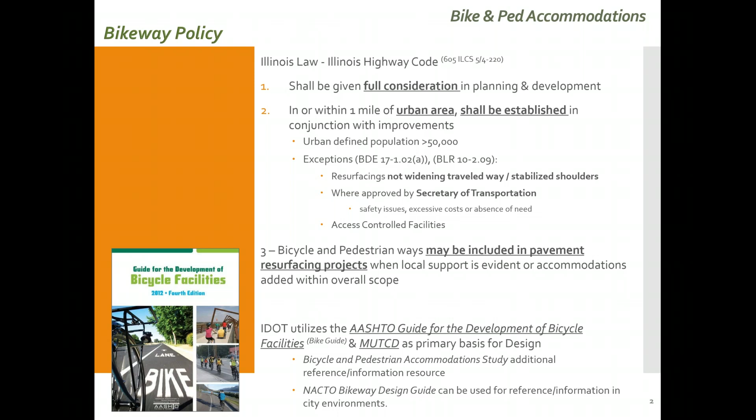So the Bike and Ped Accommodation Study is a 3-volume document that we developed that has 20 facilities for bicycles and pedestrians. It's broken down into overall findings. And basically what we did is we were starting to get a bunch of requests for these accommodations that weren't necessarily typical for IDOT to implement in state highways.

And we kind of got tired of always saying no because we just didn't know how they would perform. So we put together this document that aggregates the research done for multiple facilities in the tenets that IDOT looks to evaluate, which are safety, operations, and maintenance. So we had a consultant, Primera, do this study for us, and it's a pretty robust document. You can see how it's broken down.

Currently, it's available on IDOT's website. So the link is provided below. If you go into the travel information under recreation, trails and paths, you will see the study is available for public use.

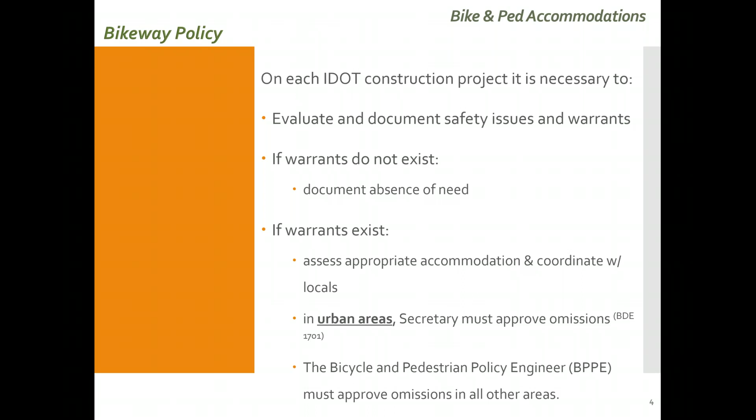So on each IDOT construction project, IDOT evaluates and documents safety issues and bikeway warrants. If the warrants do not exist, IDOT will document the absence of need. If they do exist, we will assess the appropriate accommodation. And then in urban areas, as I mentioned before, the Secretary must approve any omissions. Any areas outside of urban areas, our bicycle and pedestrian policy engineer would be the one to approve those omissions.

I wanted to put this slide here just to remind everybody what IDOT's cost participation policy is for bicycle facilities. Basically, if you're on a structure, IDOT pays for any bicycle pedestrian facility at 100% our cost. Anything on road would be 80-20 local cost participation unless it's a shoulder. At that point, IDOT pays 100% of those costs. And if it's off-road, it's again an 80-20 split. If there's an existing path, either a sidewalk or a bike path, and IDOT is impacting it, we pay for it at 100%. We replace it wherever we're impacting.

And then for maintenance participation for structures, IDOT maintains those facilities. There's a couple of asterisks in there, and it's because IDOT does not plow bike paths or sidewalks. So on structures, we'll request the local agency to take over that maintenance responsibility. But if the sidewalk settles, it's considered a structural element, so IDOT will improve it whenever it's making structural improvements to the bridge. For on-road facilities, IDOT will maintain traditional or buffered bike lanes.

And there's asterisks in there because if there's bike symbols, those are usually also transferred to the local municipality for maintenance, just because our cycle of restriping is less frequent than for local municipalities. And then locals are responsible for on-road accommodations if they're separated bike lanes, which I'll talk about in a few minutes, and then vertical separation elements as well. If it's off the road, so any sidewalk or bike paths that are off the road, maintenance is always transferred to the local agency.

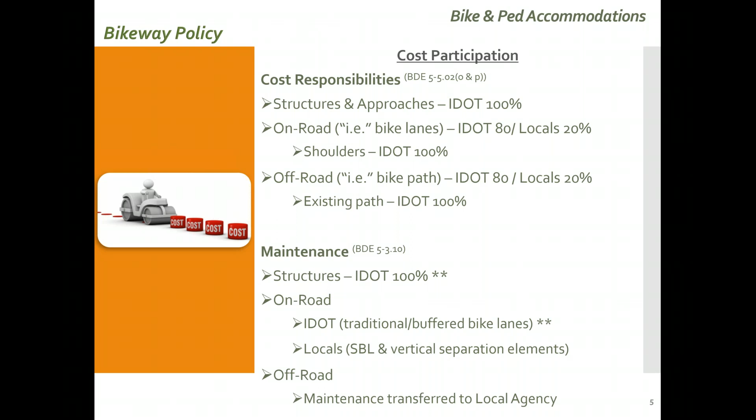So in 2019, we had an update. So the next couple of slides, I'll go through what those updates were for the Bureau of Design and Environment Manual. So there are 5 warrants that IDOT has to look at for bikeway warrants. If we meet any one of these warrants, then accommodations are pursued further. The first warrant is the planned bikeway warrant, which basically is if the route or street is designated as a bikeway or recommended bike route, it would trigger that warrant. Second warrant is a volume warrant, and I'll spare you reading the smorgasbord that's in there, but basically if we expect more than 25 bicyclists, then that warrant would be triggered.

The next one is a destination warrant, and this one was updated with the revisions. It's basically, does the road provide access to a park, recreational area, school, or other significant destination? This warrant is somewhat subjective because, what do you define as a significant destination? But it used to say, does the route provide exclusive access to a park, recreational area? So because that exclusive word has been taken out, this warrant is almost always going to be triggered because it's what do you define as a significant destination?

The next warrant is an access warrant. And basically I call this the bridge warrant. If your roadway provides access across a river, railroad, highway, or any other corridor, then we understand that structures are expensive and they're cost prohibitive. So if there's a structure that IDOT is working on, more likely than not, we will make sure that bike and ped accommodations are not precluded from occurring in the future.

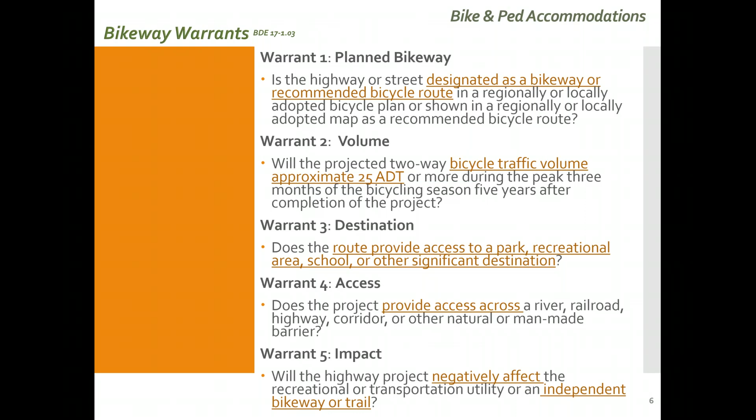This is the updated facility selection table. This is what our engineers utilize to determine what the recommended accommodations are. This table was revised; in its previous incarnation before 2019, the last column on the right was a shared use path column. So oftentimes for high-speed, high-volume roadways, that was the recommended accommodation. You can see that we've revised it to be all on-road accommodations.

And the reason why IDOT decided to go this route is so that the cost participation element of a shared use path was no longer part of the equation if it wasn't needed. So it does provide engineers the flexibility of including a shared use path in all contexts now. Whereas before it used to be high speed, high volume, now it doesn't matter; as long as you're able to put in a shared use path, you're able to do it under any context.

One thing to note is that local coordination and site conditions will affect or require modifications to the recommendations from this table. So the design may be adjusted. However, providing the highest and best bikeway facility that conditions and context dictate is better than providing no accommodation at all.

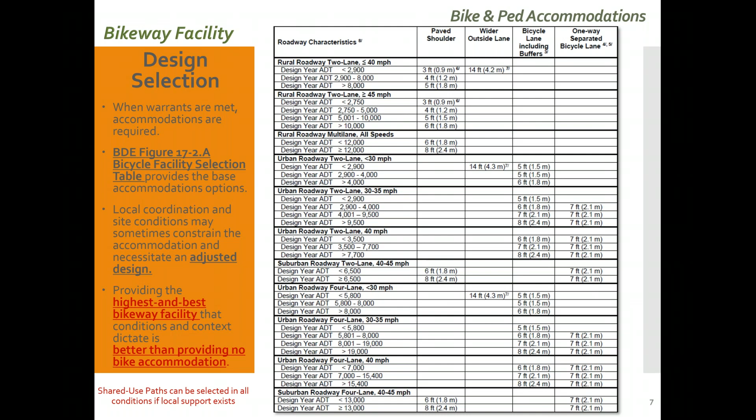This update adds some information for resurfacing projects to add some awareness to the designers that, yes, you're not required to install bicycle accommodations with resurfacing projects. However, you should take a look at the feasibility of doing it if you have the roadway space to do so. That is something that's new to the engineers at IDOT. So I have a training scheduled for them later this month to try to get them used to looking at this as part of their resurfacing.

And there's a process that we've outlined for them to take a look at these resurfacing projects. Again, because they are so short notice, oftentimes they may not be able to provide accommodations, but we're trying to encourage them to move towards the low-hanging fruit if they're able to take advantage of it.

In the case of rural projects, ever since the policy for complete streets came out in IDOT's BDE manual, we've always paved shoulders. Whereas before we used to have a 3-foot paved, 5-foot aggregate shoulder, ever since 2010, we've been doing mainly fully paved shoulders. So we will pave the full 8 feet because it's a win-win, both for bicycle and complete street accommodations for rural and suburban areas, as well as providing a safe space for cars to go if they're stalled or to pass a stalled vehicle, to improve safety of the roadway.

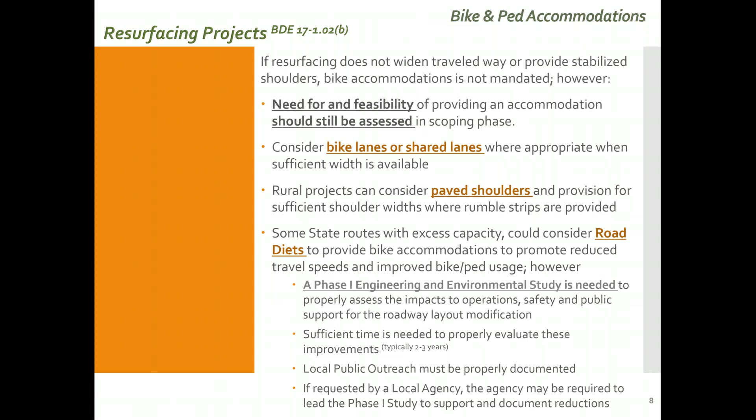One of the modifications that we've made in the last few years: rumble strips are very important to IDOT for run-off-the-road crashes. They help to wake up the drivers. However, when you have a 4-foot shoulder and a 16-inch wide rumble strip, it becomes an encumbrance on the bicyclist. So we do have a revised highway standard to have a smaller footprint for the rumble strip, still include those rumble strips, but allow at least 3 feet of space for cyclists to have a safe space to ride on.

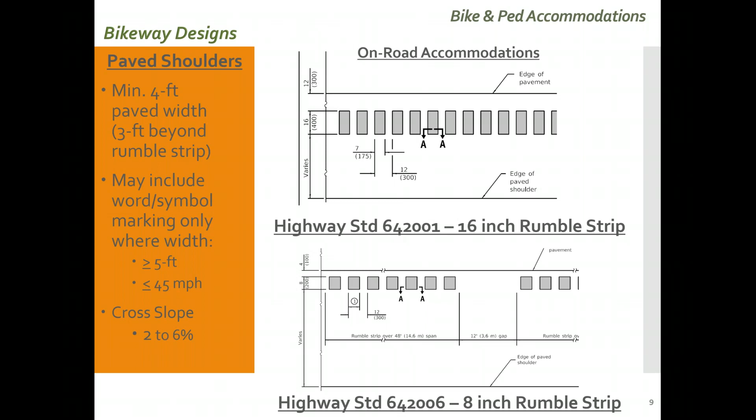So that's one thing that sometimes gets overlooked. We're just trying to make sure that people are aware that they do have that flexibility for ensuring bicycles are accommodated even on safety improvements.

So shared lane markings are a new addition to Chapter 17. They're commonly referred to as sharrows. So we have guidance on shared lane markings. They're approved in the MUTCD. So we have design guidance for minimum requirements, as well as for roadways and for bridges. And then we do provide some guidance as to the spacing of the sharrow symbols.

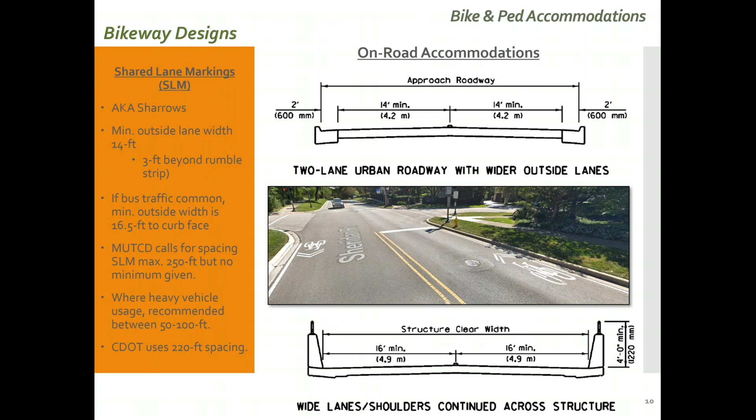And I'm not going to go into the detail of all of the different requirements and distances that are shown in the slides, just because of limitation in time. So I just wanted to make that clear. The presentation that I gave at the Ride Illinois Summit on Monday is more robust, and I go through all of these different details, and it's like a 2.5-hour presentation. So I didn't want to bore you today.

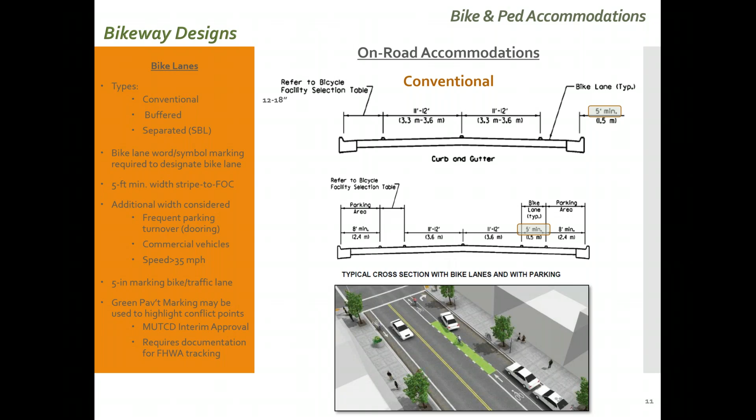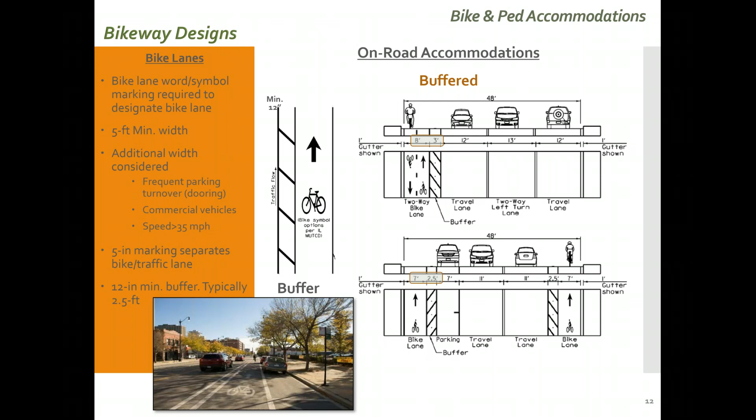Bike lanes, conventional bike lanes were included in the manual before 2019. However, we do have increased guidance on buffered, and separated bike lanes are brand spanking new. Although conventionals were always there, you can see that for buffered bike lanes, we have design guidance for 2-way buffered bike lanes, as well as 1-way buffered bike lanes. And then the separated bike lane is one of our latest additions. This is new as of 2019. It does provide guidance as to what those minimums have to be.

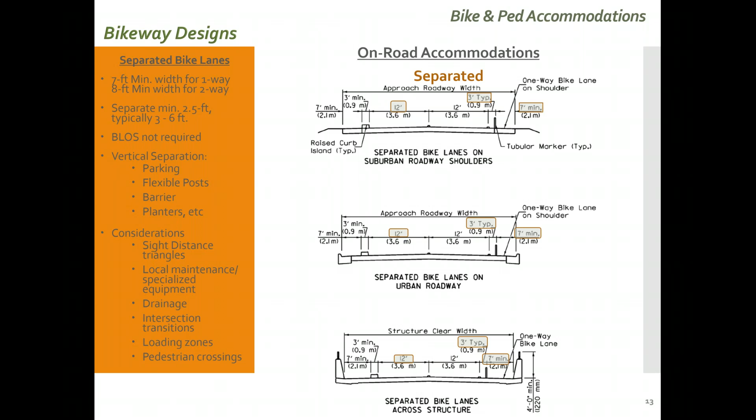We had an improvement that we did in the city of Chicago, which is to date the only separated bike lane on a state highway. And it was Clybourn Avenue from Division to North Avenue, and you can see that it was a retrofit improvement that we did, but we partnered with CDOT to develop the separated bike lane, and that study, along with the bike and ped accommodation study that we published on our website, helped to give guidance and structure to this section of the BDE 17. So it talks about considerations for drainage, sight triangles, intersections, transitions, loading zones, things of that nature.

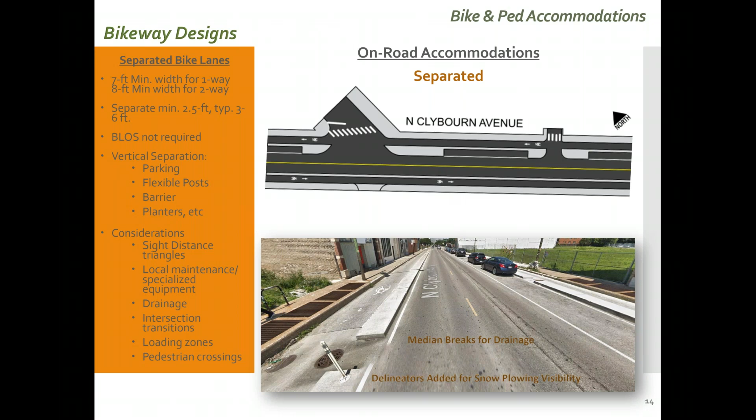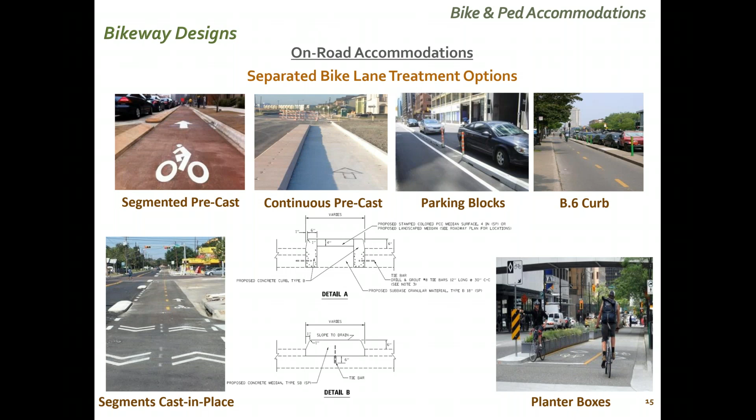As far as the vertical separation elements, we do not specify what that vertical separation element has to be. For our Clybourn project, we looked at numerous options that were available to us, and ultimately we decided on a cast-in-place B-6 curb. But there is flexibility in the policy for making it either more expensive but more aesthetically pleasing and a higher facility, or less expensive and able to be quickly implemented. So there's some flexibility in the policy for those.

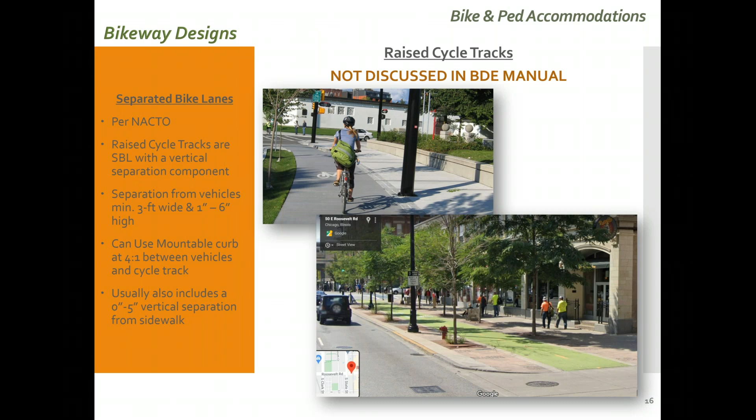One thing to note is raised cycle tracks. The city of Chicago does have some raised cycle tracks. However, these are not discussed in the Bureau of Design and Environment Manual. We are looking into this in terms of our policy. So central office in Springfield is aware that this is a gap in our policy. So they're looking into best practices and some guidance to provide our staff, so that in case a raised cycle track becomes either a request or the more appropriate accommodation, our engineers will have some guidance as to how to implement them and what requirements they have to meet. So we just wanted to make you all aware of that.

The intersection treatments section of Chapter 17 has been greatly improved. It has facilities that are brand new. Some of them are under interim approval by the MUTCD. We've introduced bike boxes, two-stage bike turn boxes, dotted bike lane extensions through the intersection. Green pavement marking is an area that our Bureau of Design and Environment Manual now discusses. Before that, it was not discussed. We do not have green pavement markings on state highways. There is a concern from our operations staff and our maintenance staff about maintenance liability for these stripings, but at least now that it's in our design manual, it'll give our engineers and staff another tool in the toolbox.

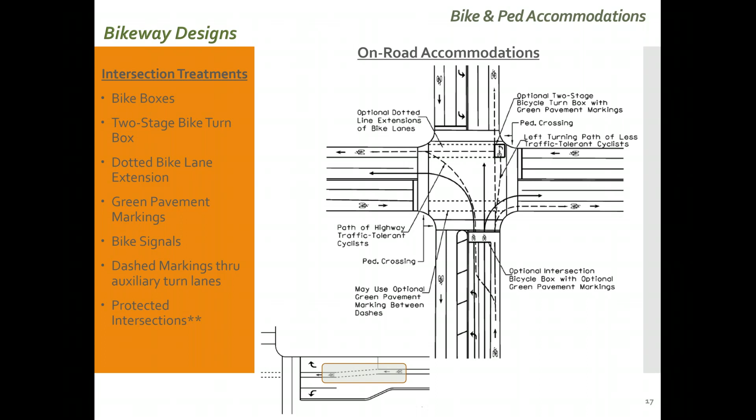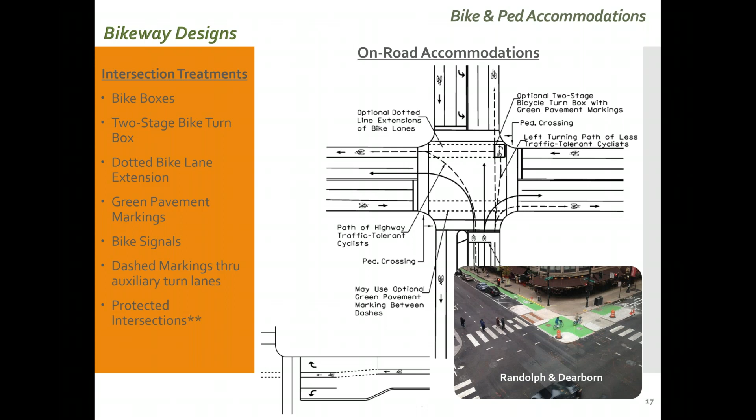So bike signals are also covered and discussed. Dash markings through auxiliary lanes and then protected intersections are also covered. And the large majority of them are brand new to the BDE manual. So if you've done projects with IDOT before, it's worth taking a second look. Bike boxes basically are designated areas for approaches consisting of advanced stop lines and bike symbols. Basically, this gives bicyclists a space to get ahead of the vehicle, so that when that red light turns green, they're able to take advantage of that and not fall behind a vehicle. So there's really important guidance on minimum design criteria and signage that's required.

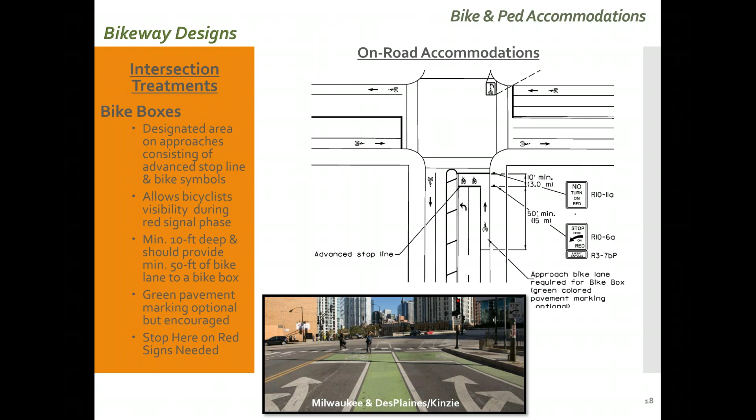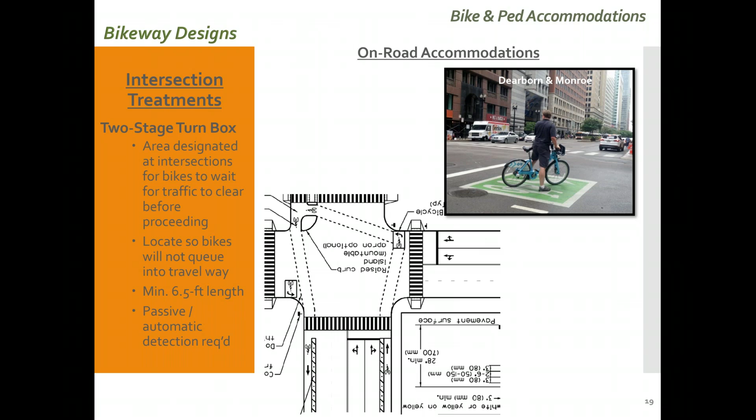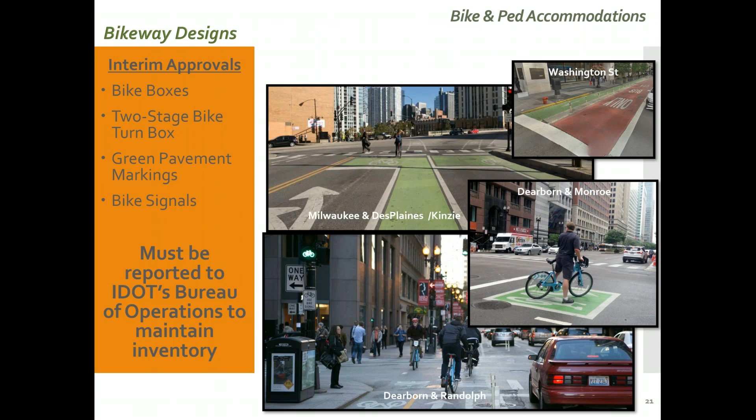Then we have two-stage turn boxes, which are areas designated at intersections for bikes to wait for traffic to clear before proceeding and making a left turn into the adjacent street. For those people who are maybe not as gung-ho and experienced to take the lane and make that left turn as a vehicle. So these are some options that are available. Like I said, bike signals are also under interim approval. So these four new facilities, even though they're covered under the BDE manual, do have interim approvals. So they must be reported to IDOT's Bureau of Traffic Operations in central office to be able to maintain an inventory and do future assessments as they become available.

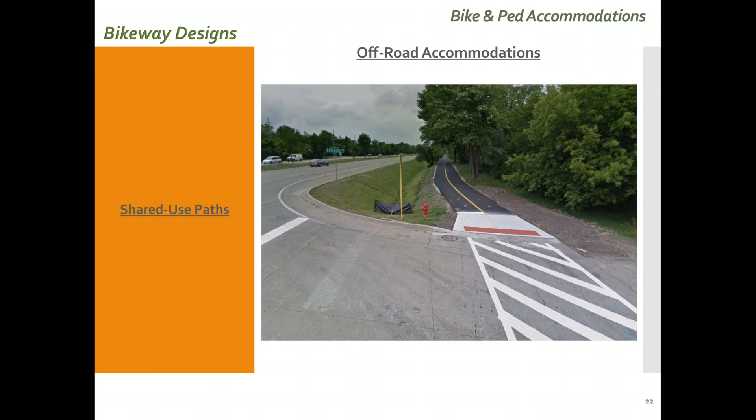Shared use paths, I would say that these have been our bread and butter for a number of years. The district strongly supports them. So overall, not much has changed in this section of the BDE manual, except for a renewed emphasis on the separation from the path and vehicles whenever possible. When you don't have separation, there are some mitigation strategies that are accommodated.

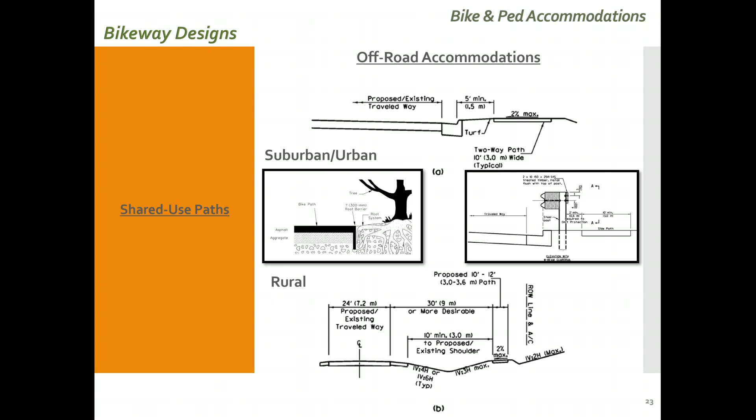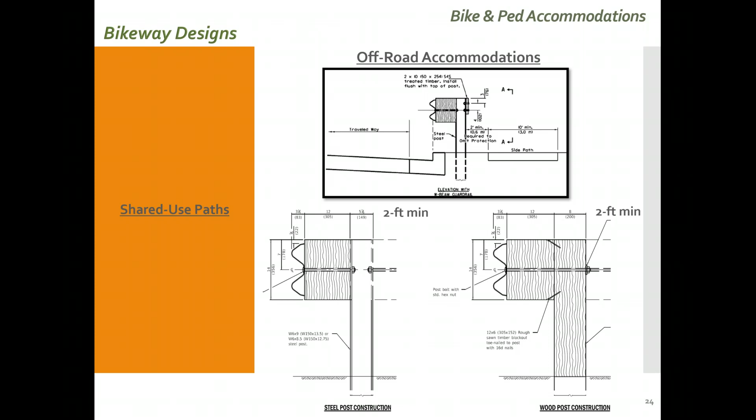Oftentimes people will think, well, I can't meet the separation, so I'll just put a guardrail in there to separate vehicles from bicyclists. Well, when you look at the dimensions of a guardrail, you're only really saving 1 foot from the 5 foot offset that's required. So really, you're not gaining all that much. There are other alternatives, such as barriers, which do have a smaller footprint, usually 1 foot to 1.5 feet. So we're trying to create that awareness in our engineers that defaulting to a guardrail is not always the best answer.

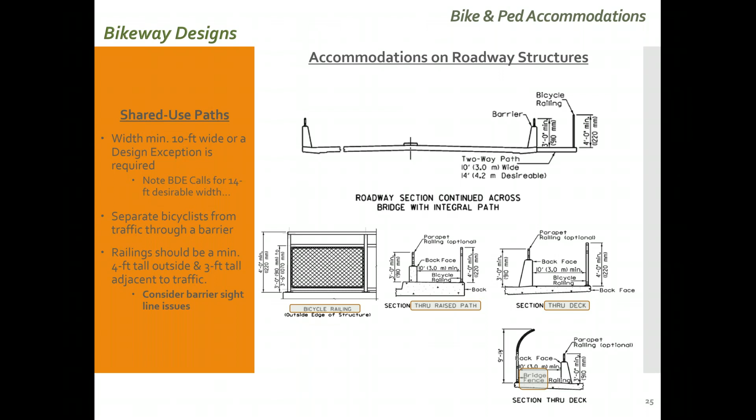The update does separate and create more awareness as to a shared use path outside of a structure on the roadway versus a path on the structure. And it does provide some good guidance: the height of the bicycle railing is a 4 foot minimum. Typically, IDOT has used 4'6", so our district has no issues with that. And then for the barrier, it has to be a minimum 3 feet in height. It's higher for bridges over expressways and access controlled facilities.

And one awareness that I try to create in our engineers is that oftentimes engineers will default to a shared use path on bridges. Well, that's fine and dandy, but you do have to take some considerations into it. Oftentimes we rely on overhangs for our shared use paths. So that last segment where the path is, is oftentimes not structurally supported. It's just part of a moment in the superstructure.

However, in our district at least, we have the Aspen A-52 bridge inspection unit, which has a clearance of only 11 foot 6 inches. We're installing a 10 foot path, and it's actually recommended to be 14 foot. If we're installing a path of that size, then you're taking away the option of being able to inspect that bridge with our current equipment. So you would have to inspect it from below, which oftentimes for river crossings requires IDOT to rent a barge, which is extremely expensive. So you're creating an encumbrance on our maintenance staff to do their day-to-day activity.

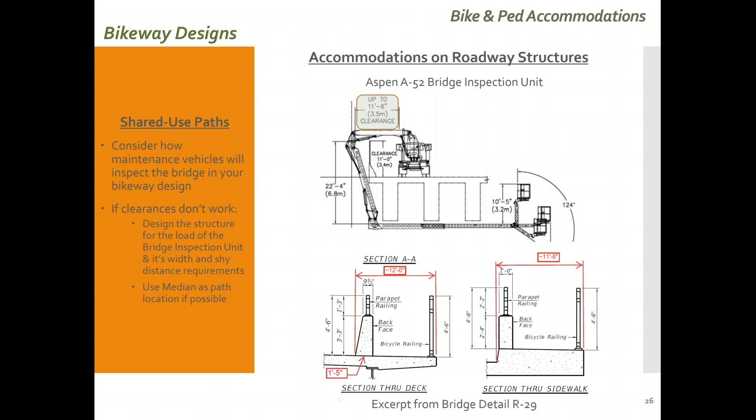So we want to make sure that our engineers are aware that it's not simply make it 10 foot, meet the policy and walk away. If you do, then you either have to go with the understanding that you're going to need a barge or an alternate method of inspection, or make sure that the path itself is part of the structural components, so that an inspection vehicle would be able to ride on that path. So we would close that path temporarily while those inspections are going on. So those are some of the new developments in our policy and training.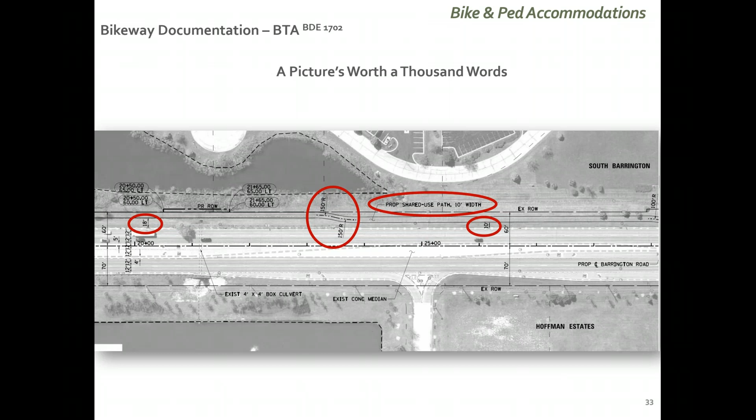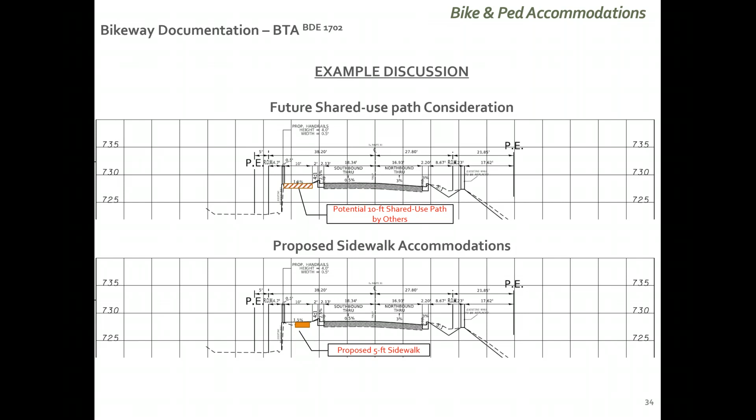And oftentimes we talk about making sure that we don't preclude a bicycle accommodation from taking place. So I love pretty pictures. So if you can send me a diagram showing, hey, the locals said that they did not want a bike path along this corridor, but again, we have to make sure to not preclude it. So you can show me in the future a shared use path can be incorporated, here's a 10-foot path with proper handrails. And then for the current proposed accommodations, they can say, well, I'm putting in a 5-foot sidewalk within those 10 feet. It meets all the requirements. We're not precluding it, and we're able to move on with our improvements.

So as I mentioned, bicycle level of service is something that is new to the policy. We do have acceptable bicycle level of service guidance for our engineers. For urban core and rural town, it's a level of service C. Same thing for suburban, and then for rural, it's a level of service D.

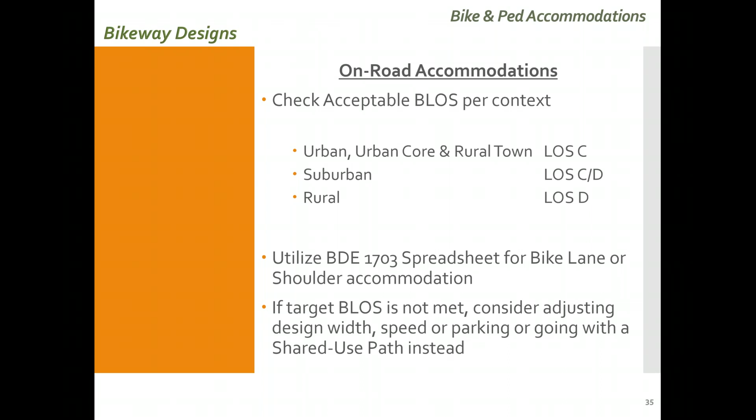There's a new form, BDE 1703, a spreadsheet with a tab for bicycle lanes and a tab for shoulder accommodations. And basically, there's no design exception that's required for not meeting these acceptable bike levels of service, but it's a tool to help communicate that there's a red flag that you should try to address. So if you're not hitting these targets, then you should look to consider adjusting either the design width, the speed, maybe removing parking or going for a shared use path instead. The table in Chapter 17, Figure 2A, was designed with these acceptable levels of service. So if you go with that table and the recommendations, then you are meeting by default these levels of service.

So here's a snapshot of what those spreadsheets look like. The heavy vehicle volume is the multi-unit vehicle, and then the pavement condition rating survey rating. We don't want our engineers to use a 9 for perfect pavement. We want to know what the level of service is going to be when the pavement is not as good. So anything under 6 calls for attention to a future resurfacing. So we tell the engineers to make sure to put a 5 or a 6 in their CRS value.

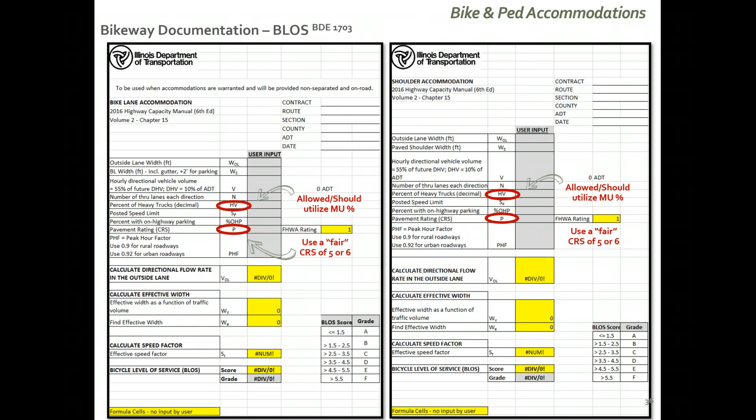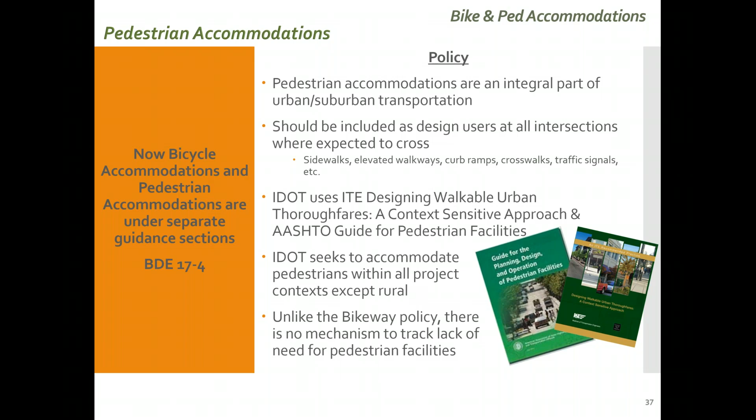Pedestrian accommodations. One of the nice things that took place in the BDE manual with the 2019 update is that with bike and peds, oftentimes either the chapter was really good with pedestrian accommodations and then very silent on bicycles, and then it took the different turn: it was very good for bicycles, not a lot of information for peds. So I'm glad that the update now includes separate sections for bike and ped. Even though some of the information may be slightly redundant, it's nice to have it in two separate places so that you can just go get exactly what you need.

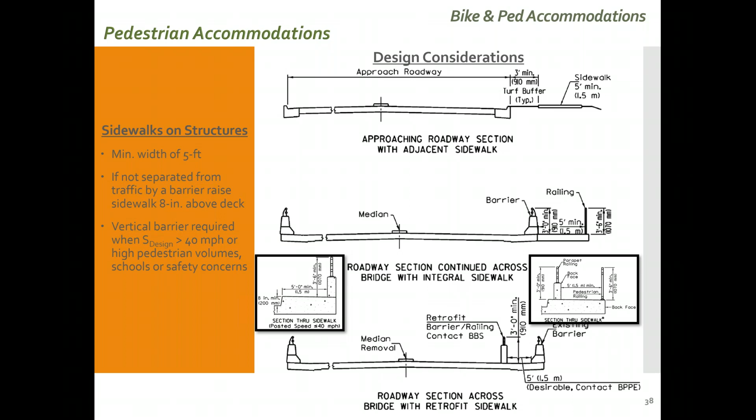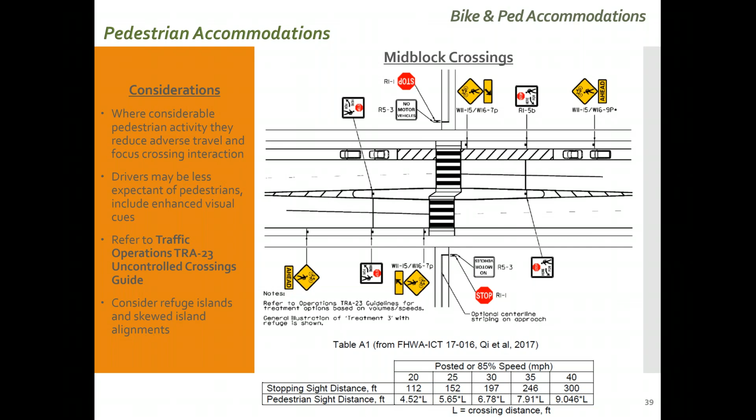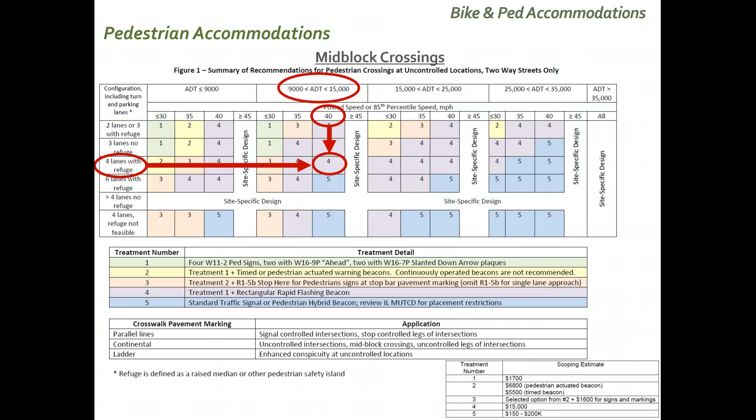So you can see that there's guidance for roadway and structures, specifically geared towards sidewalks. This isn't in the Bureau of Design and Environment manual, but our Bureau of Traffic Operations in Central Office released TRA 23, which is guidance for uncontrolled crossings. Before, IDOT did not have a way other than a subjective opinion to say whether they felt comfortable installing a mid-block crossing. So this guidance provides them with some pretty nifty tools and tables to justify the proposal of a mid-block crossing. You'll go with your ADT, posted speed, roadway configuration, and you'll be able to identify a treatment as to what the recommendation can be.

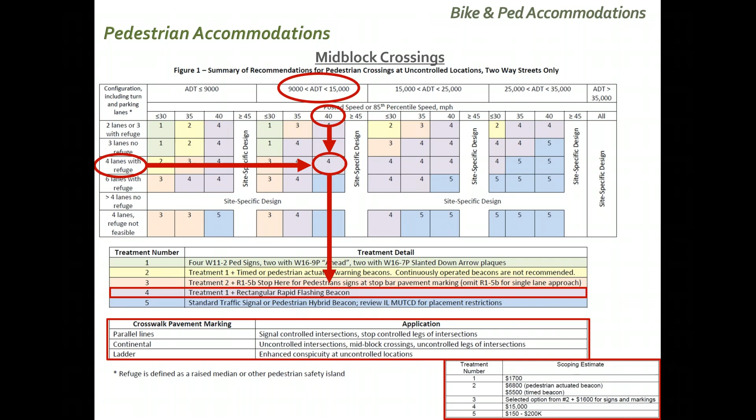It provides guidance as to which type of pavement marking to utilize, as well as some cost estimating tables to make sure that your project is not losing its budget marks. I like pretty pictures, so you'll see here the different treatments. Treatment 1 is just the crossing sign with the crossing ahead symbol, as well as the arrow. Treatment 2 has a flasher. Treatment 3 has a stop here for pedestrian with a stop bar and the appropriate signage. Treatment 4 would be an RRFB, a rectangular rapid flashing beacon.

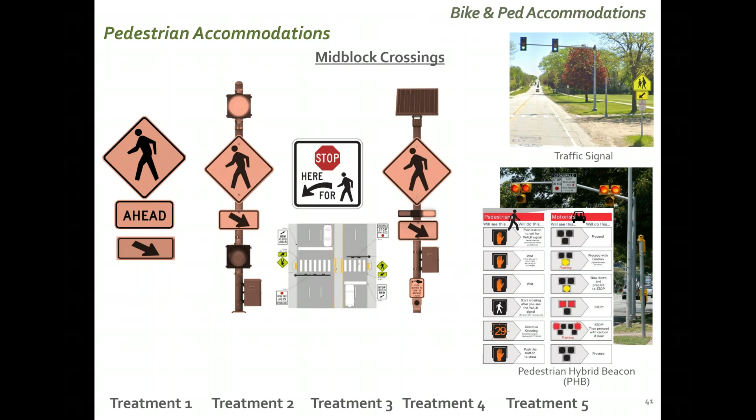And then treatment 5 would be either a pedestrian hybrid beacon or a pedestrian traffic signal. Pedestrian hybrid beacons are something that our central office operations staff is still looking at. There is no policy to allow pedestrian hybrid beacons on state highways, so it would really default to a pedestrian traffic signal. But they are looking into whether that's something that the state would feel comfortable including. It provides guidance for different crosswalk patterns.

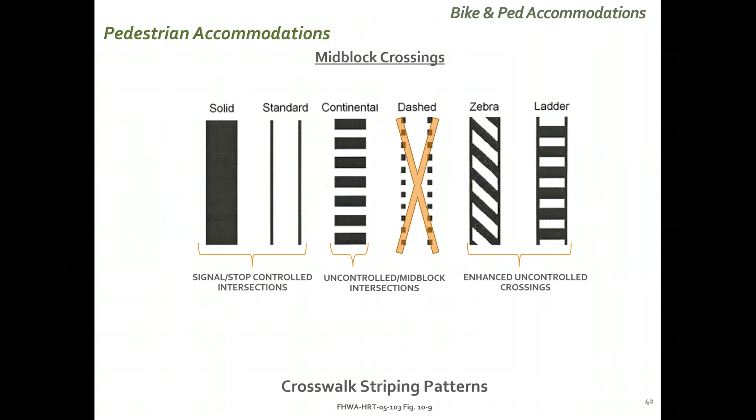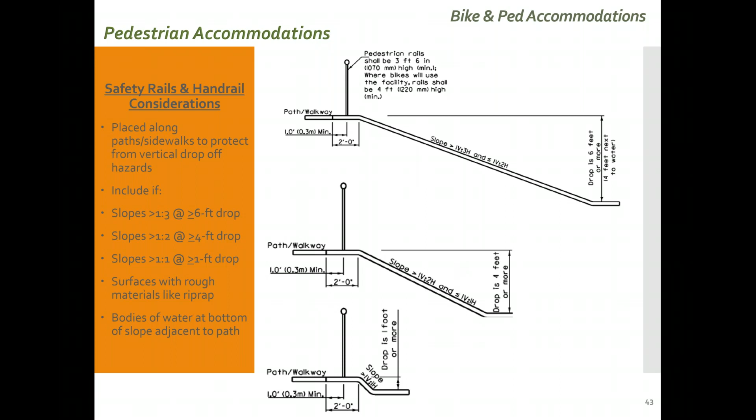And then lastly, one of the things that I really like: it used to be that engineers would come to me and ask, hey, when do I have to put in a handrail or a safety rail? What is that drop-off? And there was nothing in the BDE manual that gave me that guidance. There's very little guidance elsewhere aside from the bike guide. The AASHTO bike guide does provide this guidance, so I would always refer to that to tell them when it is appropriate to have safety rails. So I'm glad that this update included a section specifically for safety rails and handrail considerations, depending on the various slopes and drop-offs that you would have on your site.

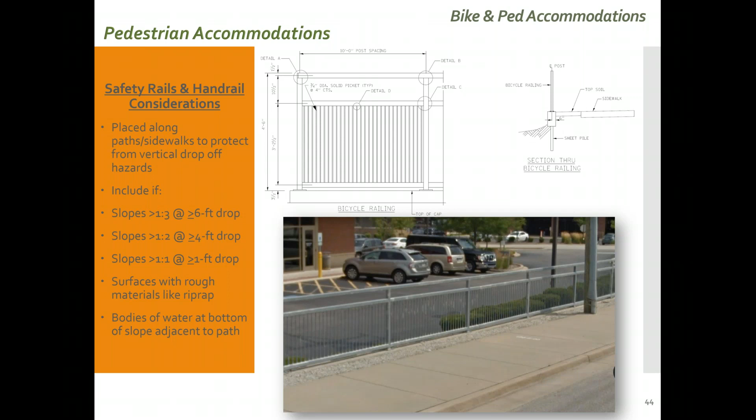So the district does have a district detail for bicycle railings. This is what that detail looks like. We have installed it in a pretty good selection of projects, so we have tested it out, and it seems to be working out pretty well.

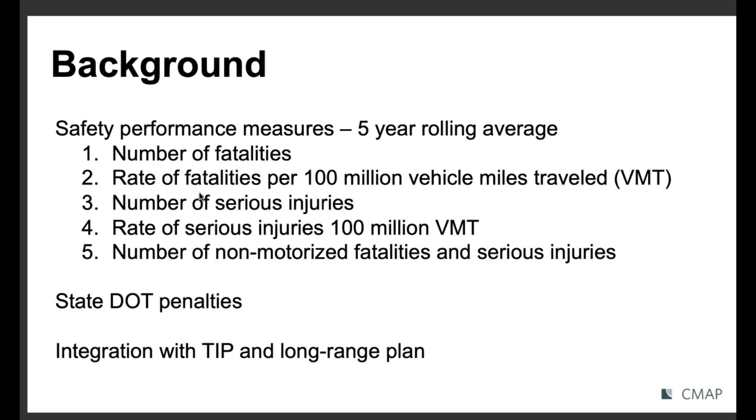And unfortunately for IDOT and the state, they did not meet the 2018 safety targets, so they are currently in penalty. And the MPO does not have any penalties for missing its targets. Whether the MPO supports the state's targets or sets its own targets, the MPO is required to show how it's planning and programming to help achieve the safety targets. This is accomplished through integrating the safety targets into the Transportation Improvement Program, or TIP, our long-range plan, and other planning activities. Next slide, please.

Before I jump into this slide, I want to provide a little insight on how IDOT sets its safety targets. IDOT uses two methods to set statewide safety targets: a policy-based 2% reduction in the 5-year average, or a trend line analysis. IDOT then selects the method that results in the greatest reduction. So usually that 2% reduction results in the greatest reduction. So the safety targets they have are very aggressive. And then IDOT does not consider previous targets when setting the new targets.

Unfortunately, the 5-year average in fatalities in the state has been trending upwards the last couple of years. And IDOT has a website where they track fatalities up to the current date for the current year. And we thought with the pandemic that we would be seeing a decrease in fatalities. I checked the website, and up to this day last year, we are just 2 behind last year. So even though we're in the midst of a pandemic, our fatalities are pretty much the same. We still have until the end of the year, but it's not looking too good for us. Next slide, please.

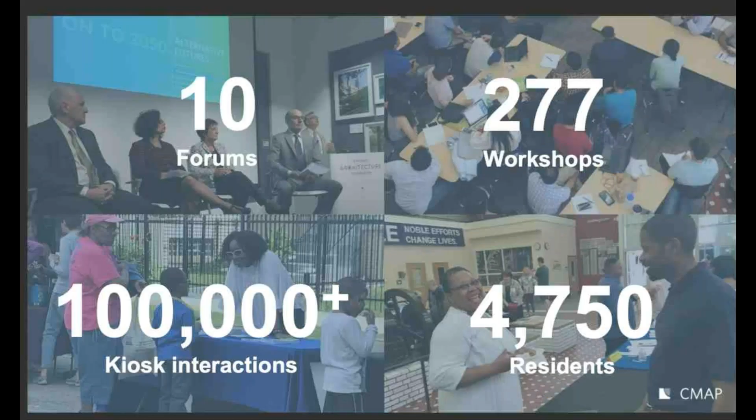And here's how that public engagement story ended. The next slide, please, Jen. So over 3 years, we did forums, workshops, we ran social media, website surveys, and we used a fleet of touchscreen kiosks throughout the region to gather public input. We would now need a dispenser of hand sanitizer next to those public kiosks, touchscreen kiosks. Most of this public engagement was in person.

And if you're wondering why I'm bringing up our public engagement for this regional plan, it's because I thought you might enjoy seeing photos of people in person, happy, glad to be engaged, talking to each other in person. And I'm going to put a question in the chat box. I'd like you to answer in the chat box, if you would: do you miss in-person public engagement? Yes, no, it depends, maybe. Answer the question right in the chat box, if you would. Do you miss in-person public engagement?

Thank you, Alan. Come on, everybody. Find the chat box. Here we go. Thank you, thank you. It depends, from Leanne. Looks like a great endorsement of in-person public engagement. Glad to hear Jessica Hyink from Evanston.

Great. So let's go to the next slide. Our public engagement now looks more like this. Let's go to the next slide. But the lessons that we learned from our public engagement for ON TO 2050 haven't changed in this virtual world. In fact, they're really more guiding principles for meaningful and effective public engagement, in person or virtual, and that is: understand your audience, meet people where they are, and deploy multiple tools and methods.